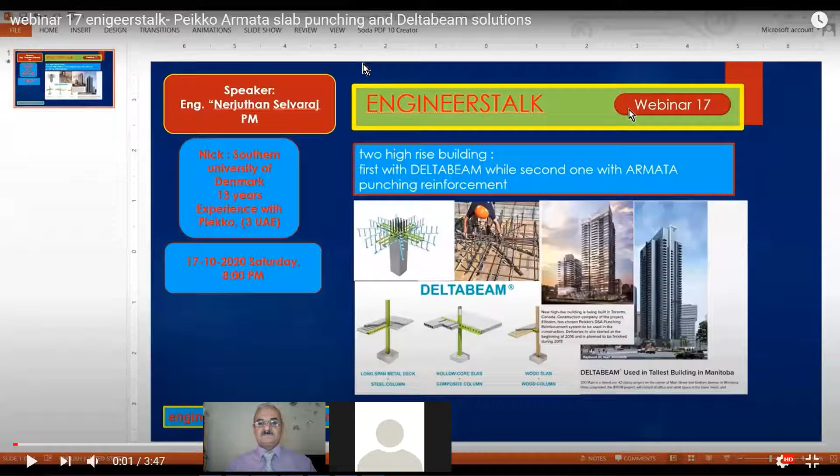Yes, if you allow me to share the screen. Yes, immediately. Yes, thank you.

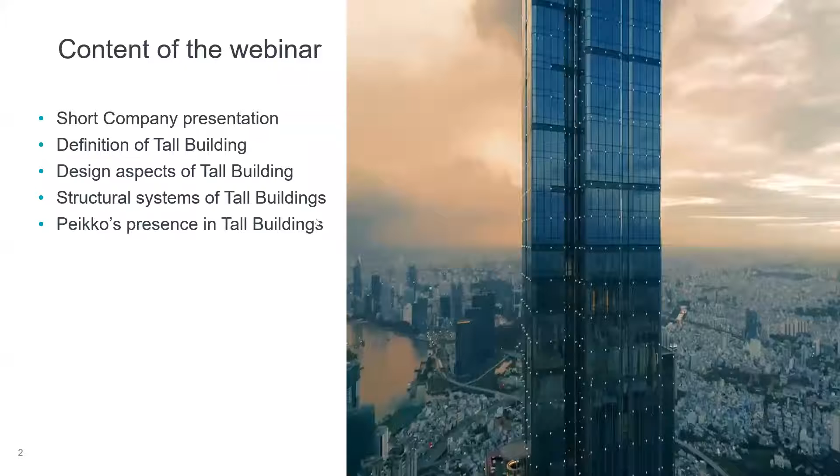And we will also move to the structural system to help resist the lateral forces. And of course, the main part of today's webinar is the Peikko solution, whose application can enhance the different characteristics of the tall building challenges.

The Peikko has been existing for more than 60 years. Actually, it was founded in a small city called Lahti in Finland, and has been run by the same family. The second and third generation has been taking the company into the new era.

All the applications provided today in the presentation are in-house manufactured. We believe independence is the key word, because many of these things are key components in all kinds of buildings, not only tall buildings.

What makes us different from other players is that we reinvest a lot of our earned money into R&D, because innovation is what keeps the company running and ensures that we are meeting the customers' needs wherever we are operating.

Basically, we have 4 main business categories related to product segments: precast connection, which I will go through today with a few project cases. Then we have cast in situ applications.

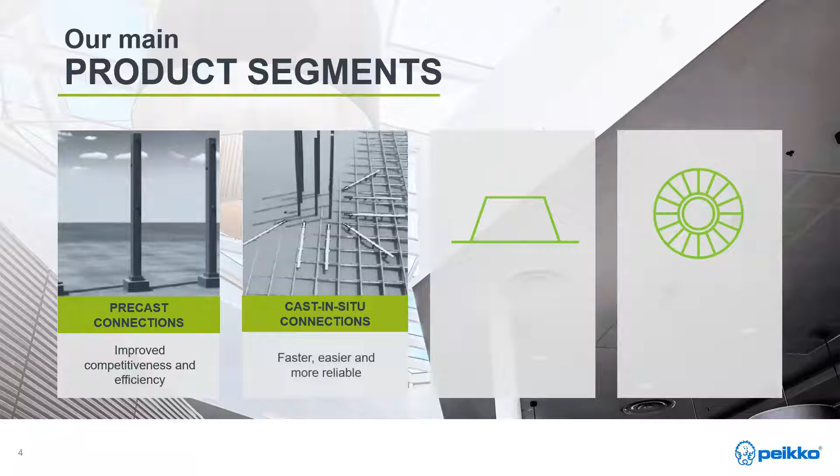Here, the product we will go through is Armata. Basically, it's a punching reinforcement to prevent punching failure. And then DELTABEAM Frame, which enhances the slim floor structure.

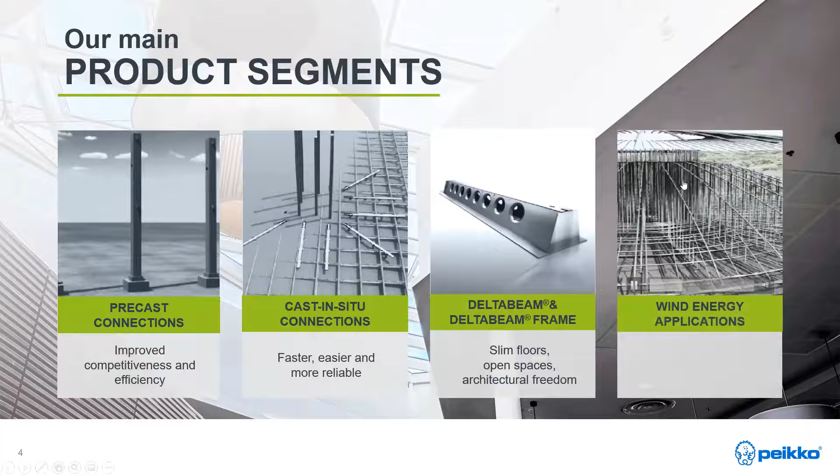And then we also have wind applications for onshore foundations - this we will not go through today. But in all 4 business segments, we are doing our utmost to be the forerunner.

It means we are doing a lot of tests, not only in-house, but in cooperation with multiple universities around the globe. Since we are a European company, most of the collaboration is done with universities located in the European continent.

Just to show you where we are operating on the global map, as you can see, we have a manufacturing facility in Ras Al Khaimah, where we are serving the GCC countries, basically the wider MENA region, along with the Indian market. Otherwise, we have manufacturing facilities in 11 different locations, from China to US to Australia.

And then we have local legal entities - basically sales and technical teams located in 33 countries around the globe.

Let's go to the definition of the tall building. You can call it high-rise building, tall building, or multi-story building. Basically, they all cover the same thing.

The Council on Tall Buildings and Urban Habitat mentioned that height relative to context, proportion, and tall buildings embracing technology are the criteria which can determine whether a building can be classified as a tall building.

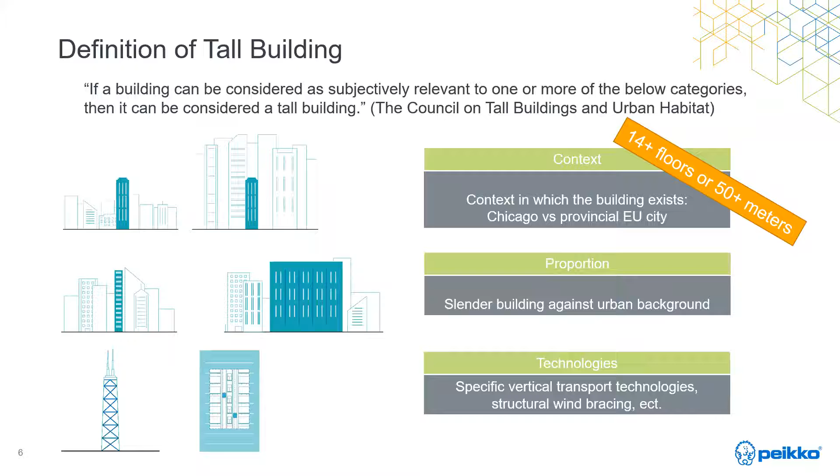If we move to the main design aspects, once the building grows taller, the vertical load increases with the height, while at the same time the horizontal loads increase significantly.

And obviously this affects the tall building much more. Therefore, a tall building must have adequate bending and shear resistance and shall not lose its vertical load bearing capacity.

Worldwide, tall building design practices differ and might be covered by a combination of gravitational, wind, and seismic considerations, depending on the local building code.

The main design objective is to ensure adequate lateral stiffness of the building. In principle, the structural engineer needs to satisfy two criteria.

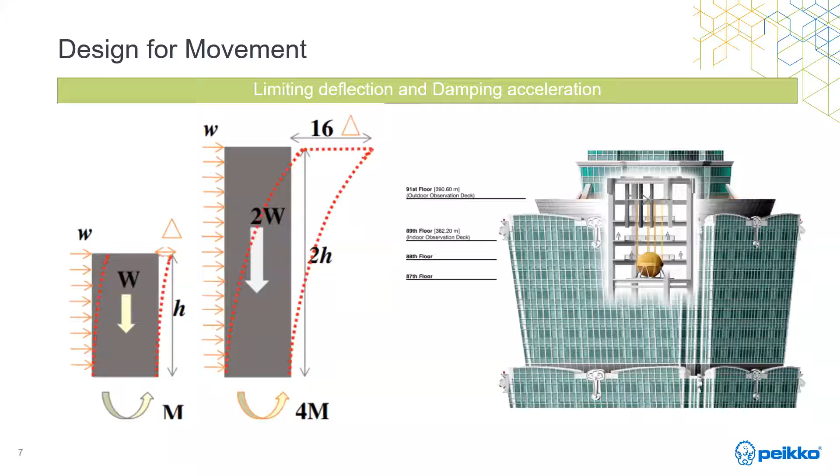Here on the right side of the slide, you can see the largest and heaviest mass tuned damper, in the world-famous Taipei 101 in Taiwan. It was once the tallest building before Burj Khalifa took over.

If we go to the classification of typical structural systems used in tall buildings, as discussed before, transferring gravity loads and resisting lateral forces is the important role of the structural system.

Therefore, the hierarchy of systems is mostly categorized with respect to their relative effectiveness in resisting lateral force. So what does this mean?

As you can see here in the picture, engineers have tried to develop systems based on exterior structures, where basically all the columns carry the lateral forces, or interior structures where you have cores or shear walls to take the stability of the lateral force.

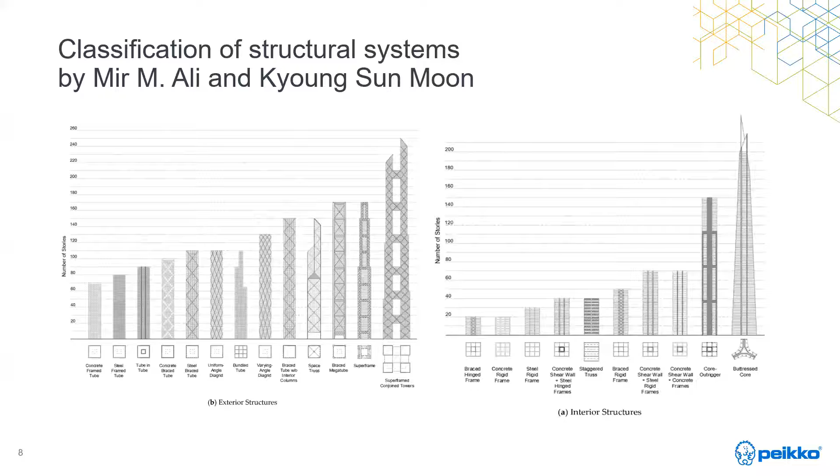Because of the time limit, I will not go through all these systems separately, but will make it much simpler.

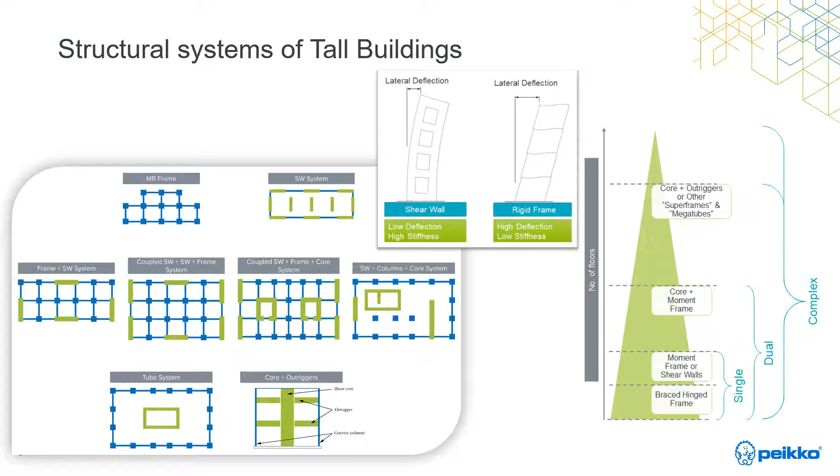So let's move to the main part of today's presentation, which is Peikko's presence in tall buildings. Regardless of the structural system chosen by the structural engineer, the connections between elements are vital in every tall building. One of the most important aspects of lateral force design is the connection between elements of the building.

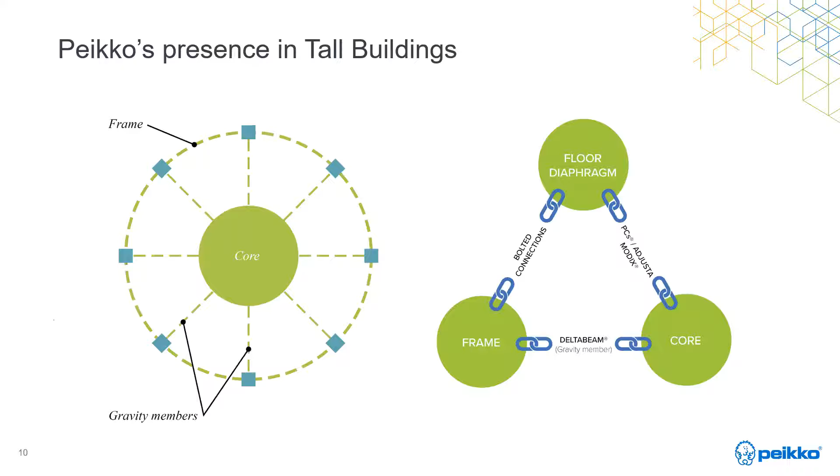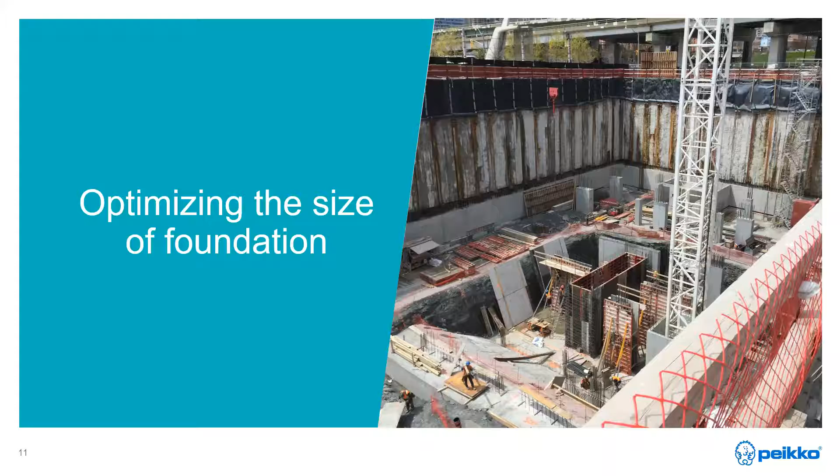On the coming slides, I will take you through some Peikko solutions with a real project case study. I'd like to start with the foundation and the kind of solutions we provide. In this case I've only taken one project with you. We have multiple reference projects in our portfolio, but since I want to showcase as many cases as possible, I've only taken one project.

In this project, Peikko's double-headed shear rail system is not tying structural elements together, but contributing to the element geometry and the construction process, which I will also cover in a later slide.

Depending on market requirements and compliance with local design or material standards, you will find two types of punching reinforcement in Peikko's portfolio. One is called PSB punching, which you'll see in some other presentations, and then we have Armata punching. The difference is that Armata is used according to ACI, and PSB is used in relation to Eurocode in the European market. So we have a system which covers both the European code system and the American code system. The same solution works for foundations, beams and walls as well for punching.

This Monde condominium in Toronto, Canada is a high-rise project using the shear rail system in particular in the foundation walls of a 5-level underground parking structure. As you can see in the picture, the site is located directly adjacent to a lake, so the walls are designed on the assumption of a water table at the ground surface. With a 5-story underground structure, this pressure creates high shear forces on both sides of each suspended slab.

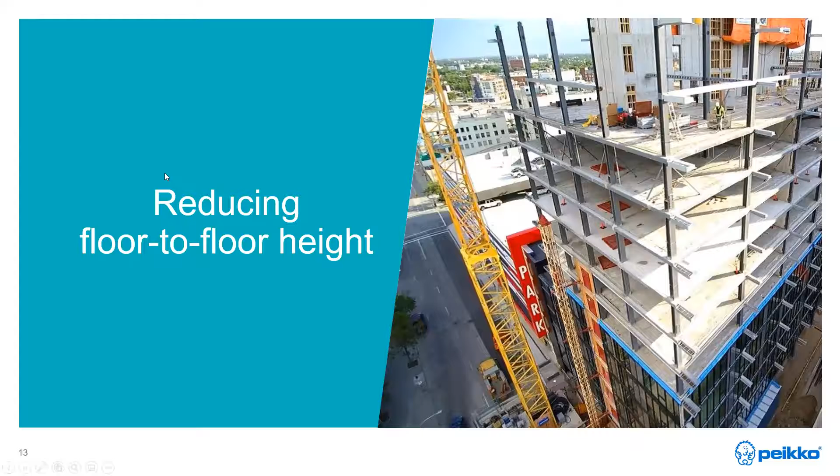It's no secret that developers want to maximize the number of floors in order to get more rentable space within a certain height allowance. The slim floor structures help very well. By reducing the floor plate thickness, floor-to-floor height becomes lower, which in turn yields more floors for a given building height.

This project, 300 Main, is a 42-story building on the corner of Main Street and Graham Avenue in Winnipeg, Canada, and it used the slim floor concept. A typical floor in this project is a combination of delta beam and hollow core, and you can see steel columns in the bottom left picture.

The other option of using hollow core with wide flange steel beams was also considered for the new tower, but this solution would have resulted in a building at least 15 meters or 50 feet taller, which would have increased the total price of the project significantly. So it was clearly a no-go on this project. Delta beam instead saved overall height, adding floors and maximizing the total square footage.

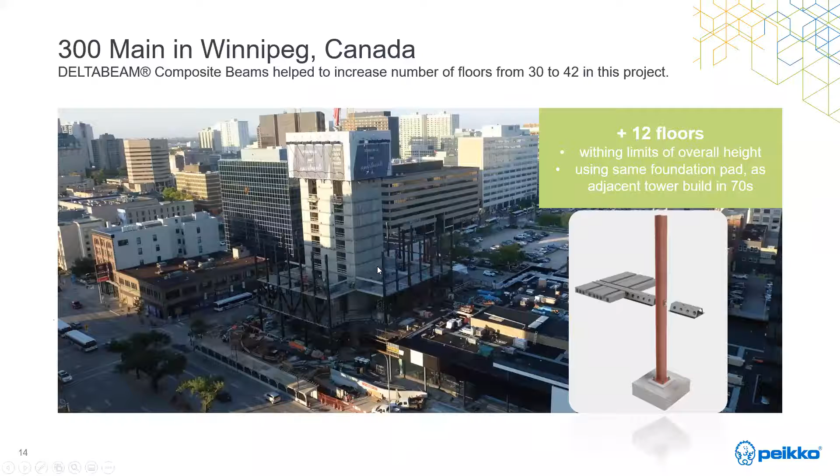Talking about the savings in the same project, I will go to the foundation size because there are a few examples of how this has been achieved. The powerful argument in favor of slim floors is that you are reducing the weight of the overall structure, which in turn makes the foundation less expensive.

In this case, 300 Main new tower is designed with the same foundation pad as a similar building called 360 Main, next to this new tower, which was built in 1979. Since the combination of delta beam, hollow core, and steel column is much lighter than the previous cast-in-situ concrete tower, the developer was able to increase the number of floors from 30 to 42, using the same foundation pad as the cast-in-situ structure.

So this is another strong argument why slim floor structures are generally very much recommendable. The added advantage of delta beam composite beam is the 2-hour fire rating without any additional fireproofing, which also proves to be a substantial saving compared to conventional wide flange steel.

The next project is also located in Winnipeg, Canada. Like the previous project, it also uses delta beam composite beams, and it played a very important role in meeting the needs of the architect and the structural designer.

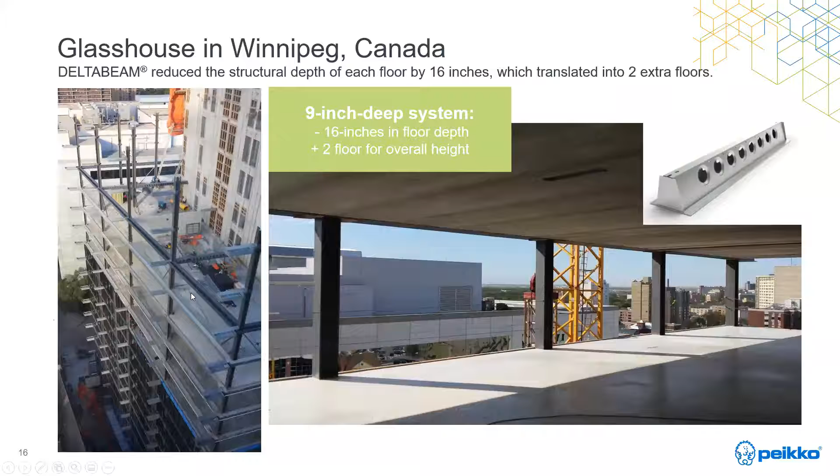Besides adding extra floors, since everything is prefab, it also allows for rapid speed of erection. Delta beam composite beams were then connected with the column using the Peikko modular PCs corbel.

I think you can barely see it here. It's actually a hidden corbel system, welded from the factory onto the steel columns. So it gives you this kind of Lego-like ease of installation.

And flat ceilings, as you saw in the previous slide, also mean straightforward HVAC installation that further reduces your building time. An additional bonus to the Glasshouse site was that the delta beam composite did not require any of this kind of intumescent coating.

Intumescent coating is a standard industry procedure. If you have exposed steel, this has to be done on site, and it takes time. You need a primer, a base coat, and a top coat. None of this was needed with delta beam, as the beam is cast in concrete.

To prove this point, delta beam has actually been UL tested and has achieved 2 hour, 3 hour, and 4 hour fire ratings without any additional fire protection on the exposed steel part of the delta beam.

The next project in the slim floor category is not with the delta beam, it's with our PSB and Kobo. Now we've moved to the European continent, and we will not have Armata as mentioned earlier. We'll speak about PSB, basically the same product, but due to local requirements, we call it PSB.

Reinforced concrete slabs have been used in this project, supported by high-strength precast concrete columns and shear wall cores. Generally, in-situ flat slabs are characterized by the absence of beams. Whatever loads are added onto the slab are transferred directly to the column, so the columns need to punch upward through the slab.

So to avoid drop panels over the column position in the slab and to accommodate the high shear stresses, Peikko PSB punching reinforcement in combination with Kubu column caps was applied for this project, as you'll see in the next slide. Kubu is basically additional reinforcement to take high shear force along with our PSB.

This is the Kubu, the steel part placed on top of the column, and the thickness of the slab was kept at a relatively low level with the help of our product. Part of the concrete and column were produced in a precast element factory and delivered with our Kobo, as you can see on the right side of the picture.

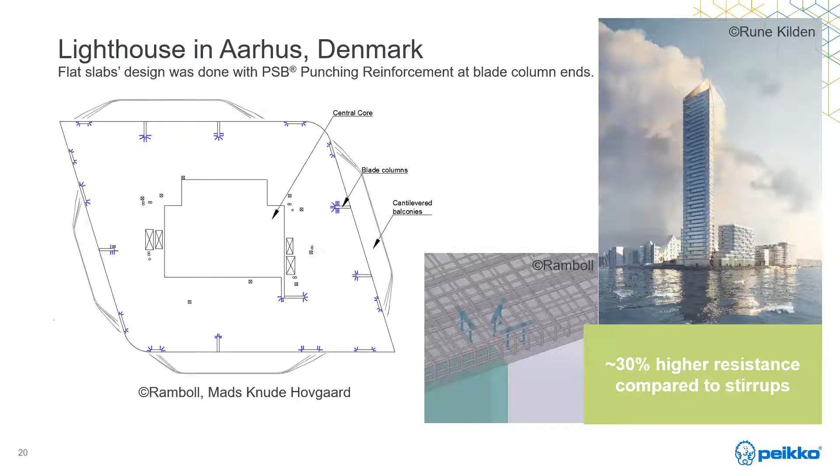The project is ongoing and planned to be completed in 2022, and it will be one of the highest buildings in Denmark.

The last project I'll take you through is the Alsik Hotel, also located in Denmark in the southern part, in a city called Sønderborg. It's designed by the world-known architect Henning Larsen, who also designed the Ministry of Foreign Affairs in Riyadh. This is the picture you can see, just a bonus information for you guys.

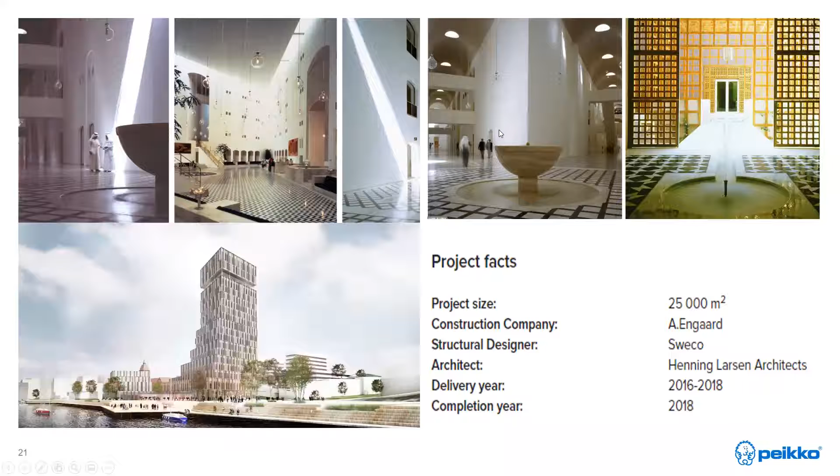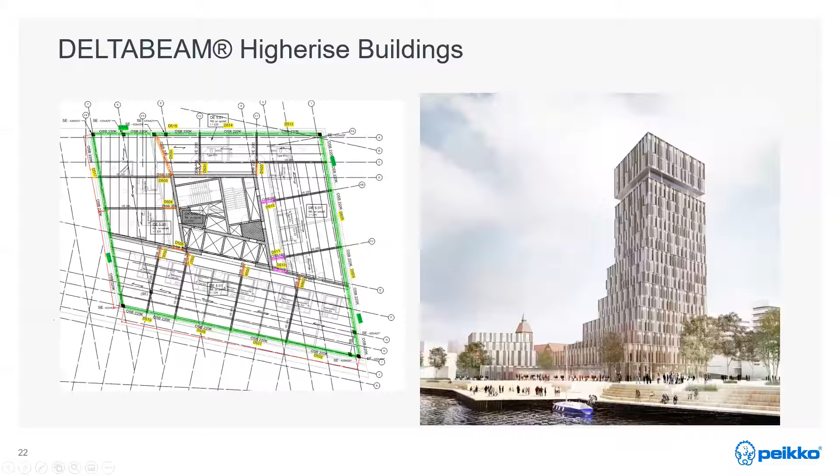The structural concept is very much in line with what we already spoke about. You have a central core in the middle, cast in situ, and then precast columns in the perimeter with a delta beam in green, and internal beams, as you can see here, the small beams in the corridor area. So the MEP can be done without any drop beams, supported by precast walls, shear walls here. This is how the structural system has been done.

So in the next slide you'll see the detail. The delta beam runs through the columns, and we've also utilized the Peikko column shoe in this connection, which I'll come to later in my presentation.

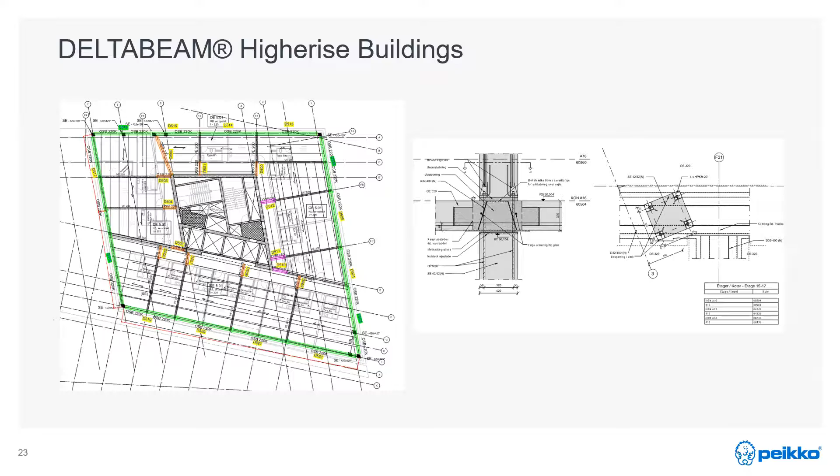One of the main challenges was to control the deflection in the delta beam. They had these glass facades, and the facades are directly fixed to the delta beam. Due to the sensitivity of deflection on the facade, the supplier had a very high demand on the deflection criteria. So all the beams on the periphery here are designed for L over 2000 for the incremental deflection, applied by the movable deck load and live load.

So we can design the beam for a very tough deflection requirement as well, and still achieve a relatively slim floor structure.

Let's move to the main part of structure in the tall building: the core. During construction, the engineer's concept is to keep the core without any protruding elements, because this enables you to use climbing formwork, as you can see in this small animation. I will go through some applications which can meet this requirement without any protrusion or bent bars sticking out, and avoid wet connections which can be hard to control.

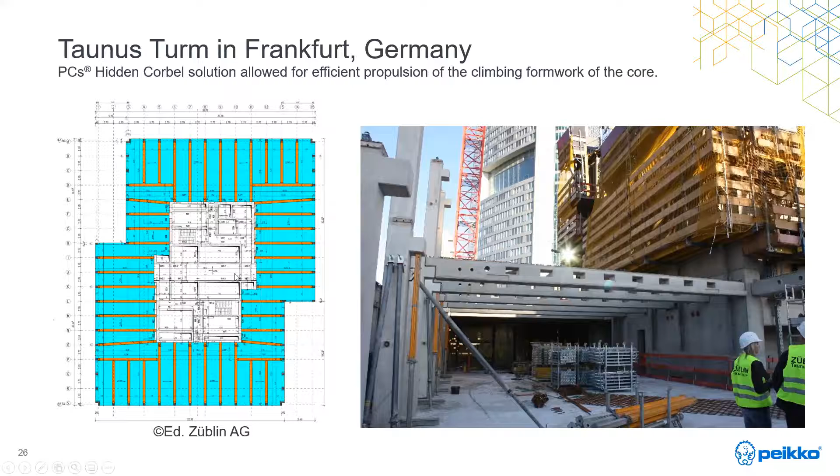Go to the next slide. You will see here cast-in-situ reinforced concrete shear wall cores are widely used in tall buildings, as mentioned, simply because in-situ concrete technology is favored by many engineers due to the structural continuity it provides. But on the other hand, we are seeing a clear increase in use of precast concrete technology in tall buildings, and the main advantage is high speed of construction, reduced shoring requirements, and easy quality assurance at the site.

The major challenge in this project was the limited space available on the building site; storage capacity in the upper floors of the tall building was very limited. So prefab cast concrete columns, beams, and slabs were selected to eliminate the need for space-consuming formwork. To simplify construction, you can see in the picture our PCs corbel has been embedded into the shear wall before the reinforcement cage was applied.

Once you remove the mold from the core, you get a clear surface, and then you fix the steel part afterward, shown in red. Into the concrete beam you have our beam shoe, which is embedded into the precast plank, making it a simplified installation process. There's a recess in the bottom, and you simply slide it onto the column.

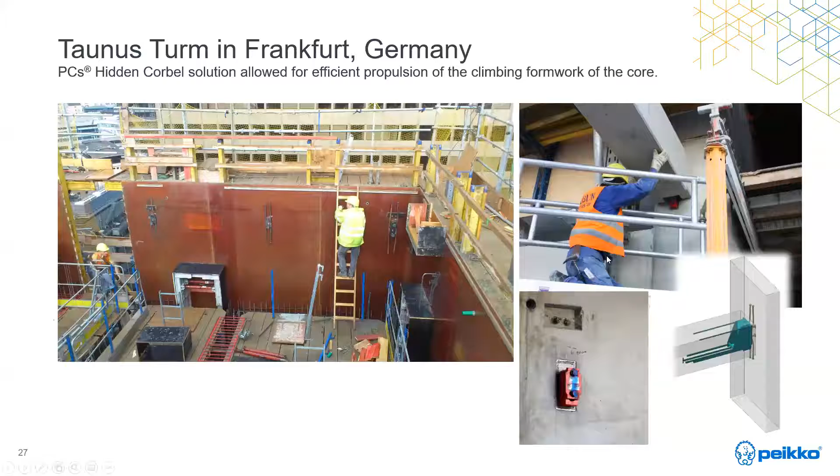In this section, I would like to introduce how to connect structural elements in a simple way. Some of the items I will go through are basically Peikko bolted connections, and here we will look more closely into the single element itself. The first project I will take you through is again in Germany, Frankfurt.

A central feature of the architectural concept here is the hip swing, as you can see, with alternating cantilevering of the 15th to 22nd floor residential levels. The direction changes with a cantilever of up to 5 meters. At that level, the building forms a spiral by shifting the stories along its vertical axis. Above the 22nd floor, the tower returns to optimize floor areas and complete its rotation, realigning with the structure underneath these alternating cantilevers.

Additionally, the first three base levels, designed as public space, are also offset along the vertical axis, which means the geometry of the supporting section had to be optimized in order to minimize the inclination and deflection of the columns.

The office floors from 3rd to 15th and from 23rd to the roof have the same regular floor plates. For these typical floors, the diaphragm consists of main beams, as shown in the typical floor in the center of the slide. Again you have a core, the outer perimeter is supported by precast columns and precast primary beams, connected by secondary precast beams. So there are a lot of connections which have to be considered.

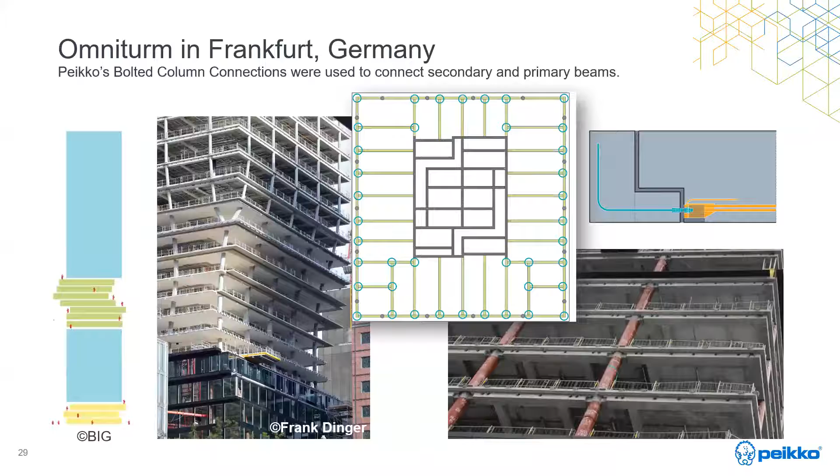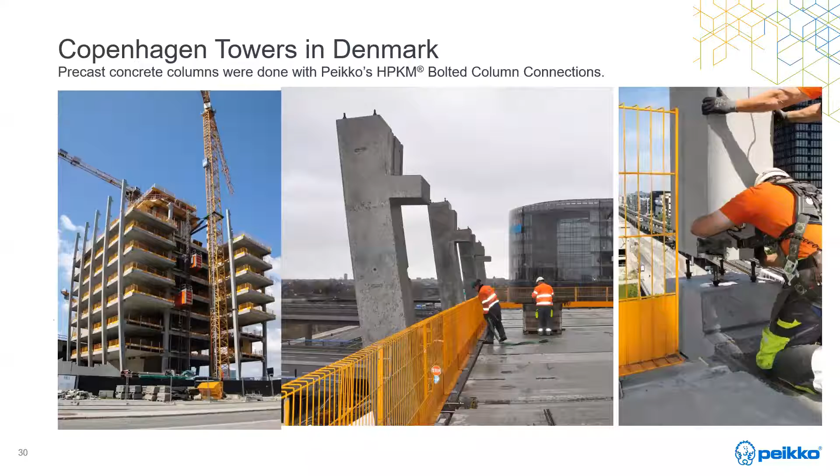Since crane time was decisive when building this tower, it was decided to use 2-story precast concrete columns in the facade. The 2-story facade column, as well as all other precast concrete columns, were done with Peikko's HPKM column shoe. Here you see on top of the column the anchor bolts embedded in the concrete column, and here on the bottom part of the column the Peikko column shoes embedded. It's 4 bolts and nuts tied together, and once the bolts and nuts are tightened, you have a fully rigid system. As you can see in the picture, no bracing is required. This was again one of the reasons why we were chosen as the design partner and supplier of the system.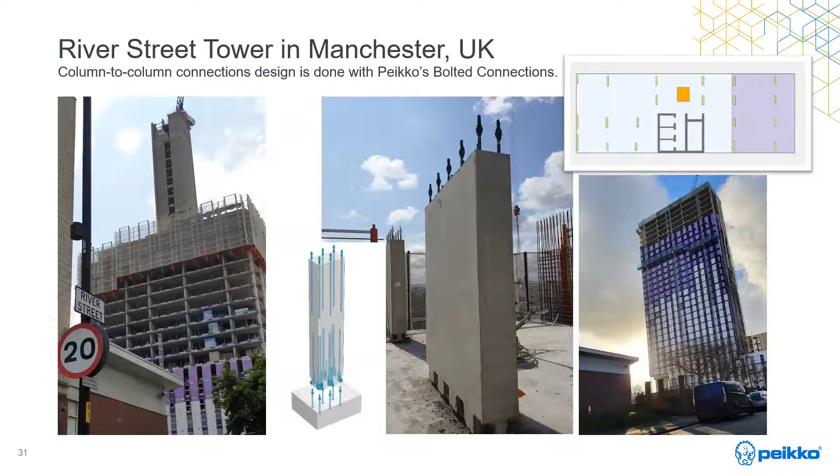If we go to the next, design flexibility. In this section, I will showcase one project where normally Peikko engages as a design partner when the project is, let's say, not from the concept stage, but we come in providing the stiffness value to ensure that global stability is secure. So we are not doing the design itself for the full structure; that is the responsibility of the main lead consultant. But there have been cases where Peikko has taken the full scope of design.

In the next slides, I will go through one of the projects. This is actually a 20-story tall building called Icon, located in Sweden. The key feature here, as you can see in the top left corner, is the massive cantilever which forms the crown of the building.

The global stability of the building was achieved with a braced Delta Beam frame, a steel and concrete composite structure consisting of composite columns and Delta Beam composite beams. The composite frame was paired with hollow core slabs and a precast elevator shaft, so no cast-in-situ element at all, no cast-in-situ core whatsoever.

With the Delta Beam frame, as mentioned previously, you can maximize space utilization, making room for more people within the same available space. Besides the slim floor that allows for greater floor-to-ceiling height, the slender composite columns take up very little space as well. This translates into more floor area to sell or rent.

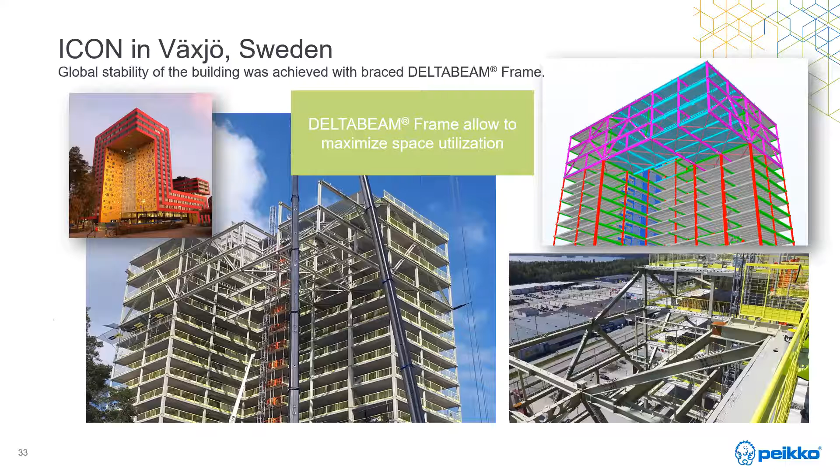If we go to the next slide: in this structural system, the Delta Beam frame is based on nominal pin joints between beams and columns, while the sway stiffness of the frame is arranged by diagonal braces, as you can see in the picture here. In a braced structure like this, most of the beams and columns are designed for vertical load only, assuming the braced bay carries all the lateral loads. So the lift shaft, which was precast, due to its very low axial load, was not even considered to take any lateral load resisting contribution.

As mentioned previously, the unique feature of the building is this 3-story crown structure on top of the building, with up to 14 meters of cantilever from the building footprint. This was done mainly with cantilever trusses bolted together at the site.

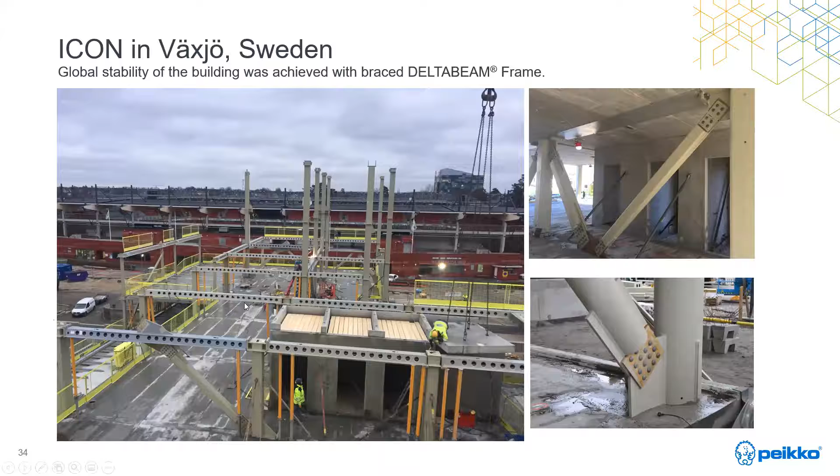And if you want to combine precast elements with cast-in-situ structure, as showcased in this very complex building, we have connection details to accommodate that as well.

Before we go to the question and answer time, I would like to showcase three different videos which show the projects in real action.

The first project is also located in Copenhagen. It's a G+30 building, if I remember correctly, with a core in the middle, and the rest of the elements are precast. Here you will see the bolted connection in action.

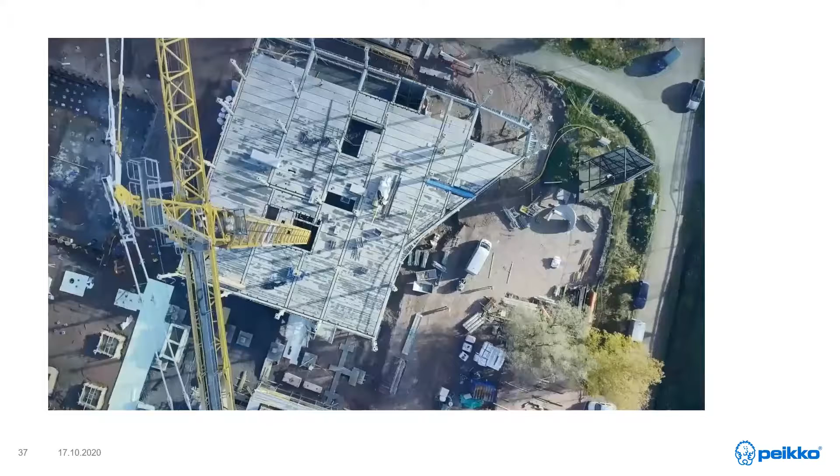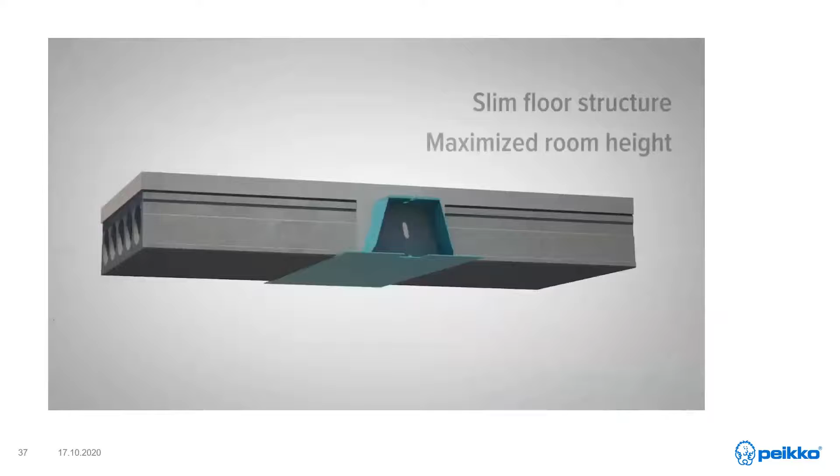Are you looking for a building frame that saves both time and effort? This is it, the Delta Beam frame. A complete one-supplier solution consisting of Delta Beam composite beams, composite columns, and other additional steel structures of the frame. Being a slim floor structure, it allows for a maximized room height and up to a 12 by 16 meter grid. Additionally, Delta Beam frame enables architecturally demanding facades and shapes and flexible open spaces.

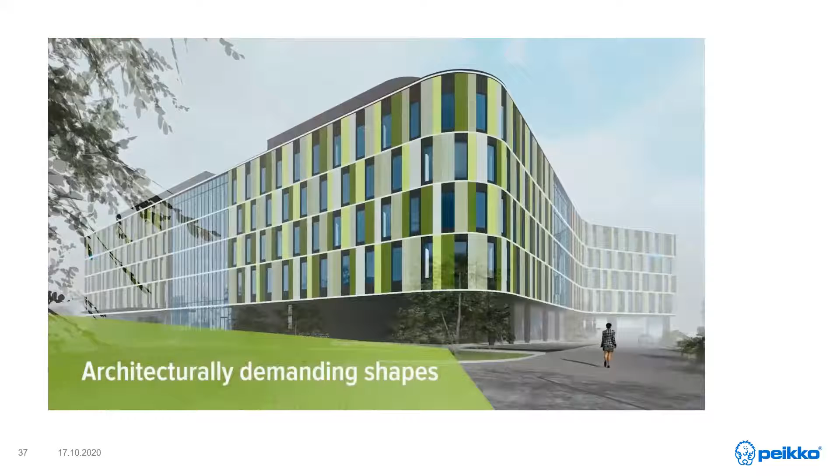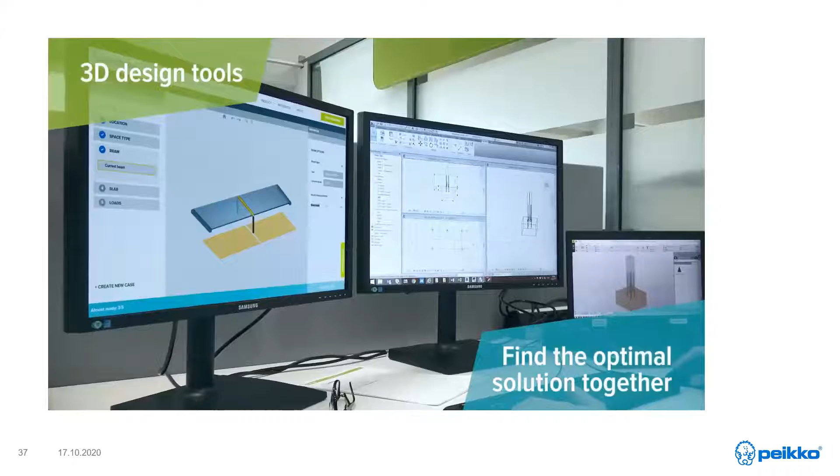Our expertise in modern 3D design tools helps us find the optimal solution together with your architects and structural designers. The CE marked frame components are manufactured in our state-of-the-art factories. Components are easy to transport, store, and install.

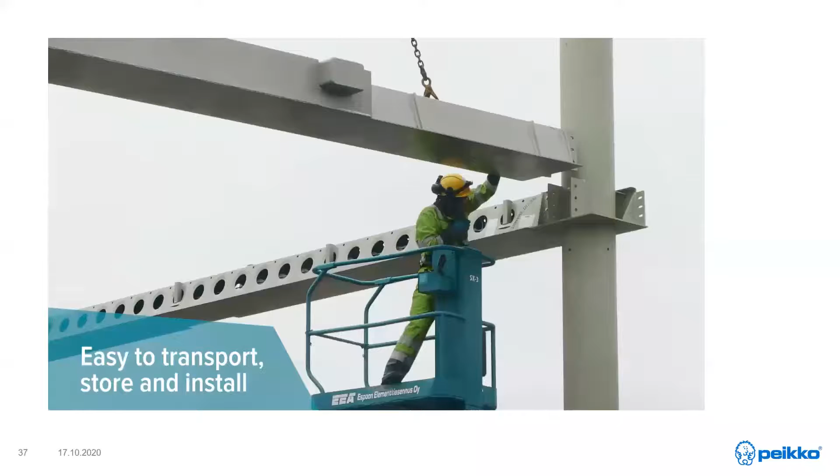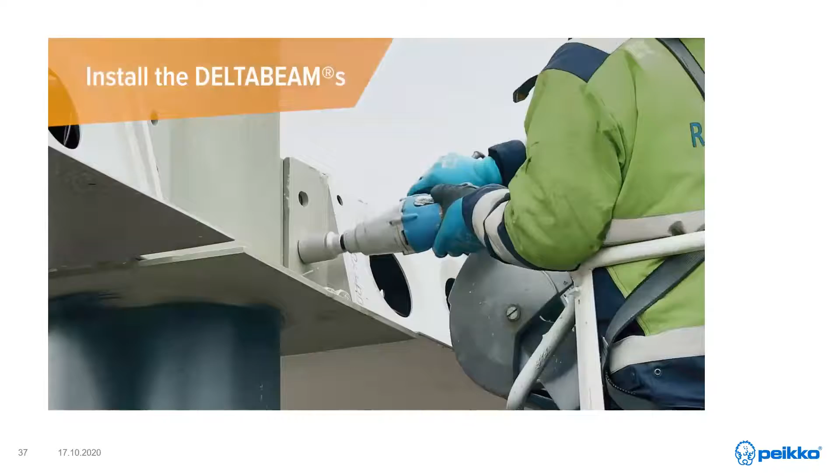First, erect composite columns with our bolted connections. Next, hoist and install the DELTABEAMs. Now you're ready to install the slabs, whatever your chosen system is. Fill the composite columns with concrete and cast the DELTABEAMs while you concrete the slabs.

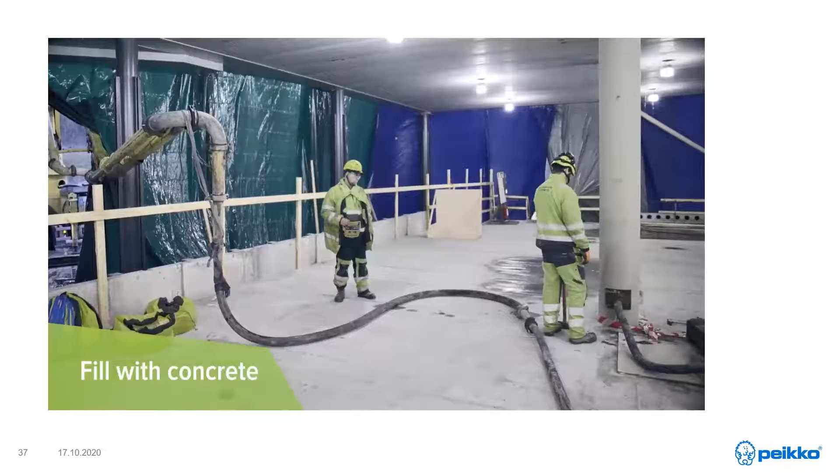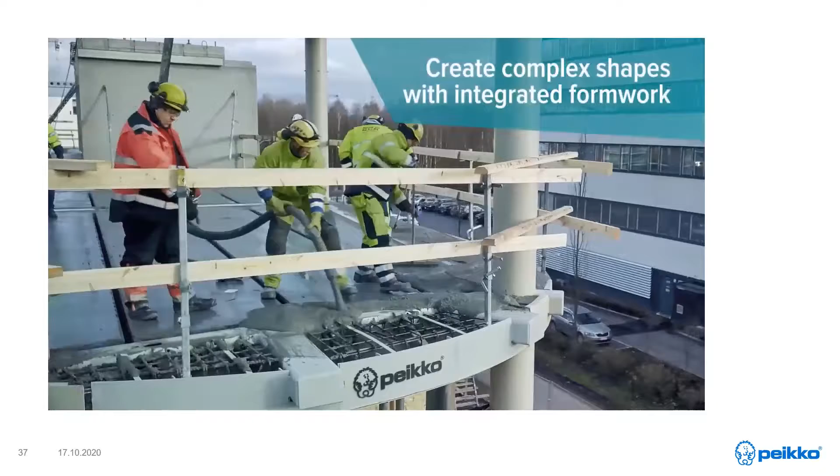Note that you don't need any extra fireproofing. DELTABEAM frame has structural fireproofing built in. Additionally, you can create complex facade and interior shapes with formwork integrated in the DELTABEAMs.

Easily install safety rails. Use Petra slab hangers to create openings in the slabs. Install the wall elements fast and easy with Sumo wall shoes.

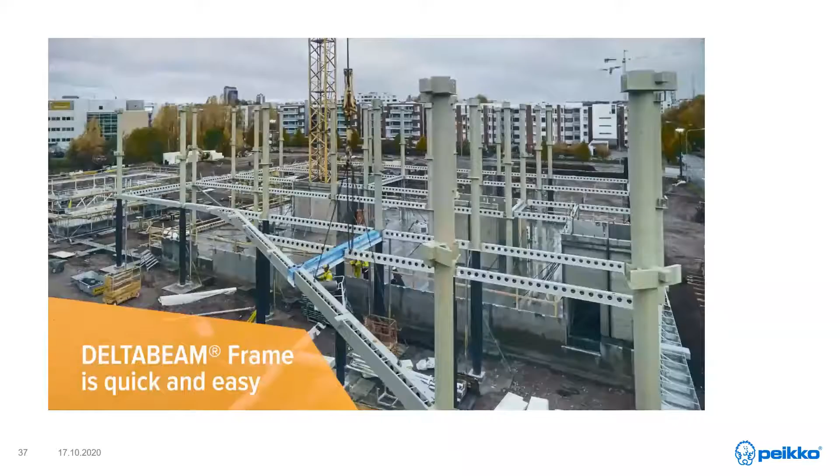A single frame supplier for saving time and effort, the DELTABEAM frame is easy to erect piece by piece. For you, it means an easy-to-manage project. For more information, take a look at Peikko.com/deltabeamframe and choose the faster, safer, and more efficient way to build frames.

The last video is not a real project presentation, it's actually an animation of our Armata. What I can say is that we have done multiple projects in KSA with this Armata for large projects where there has been substantial savings for the contractors, and of course achieving your slim floor so your MEP can run through without any bendings. So let's have a look at this Armata and then we will go to the Q&A.

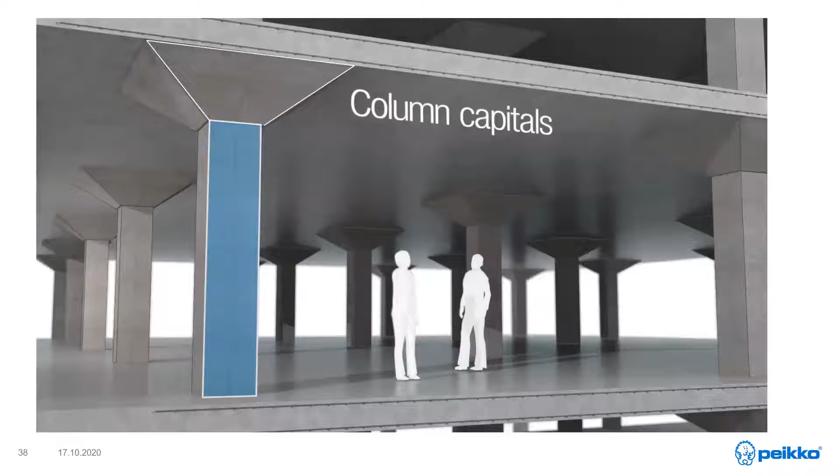Just to give you a bit of information while the video is running, the idea is to avoid the kind of drop methodology you are using to accommodate punching forces.

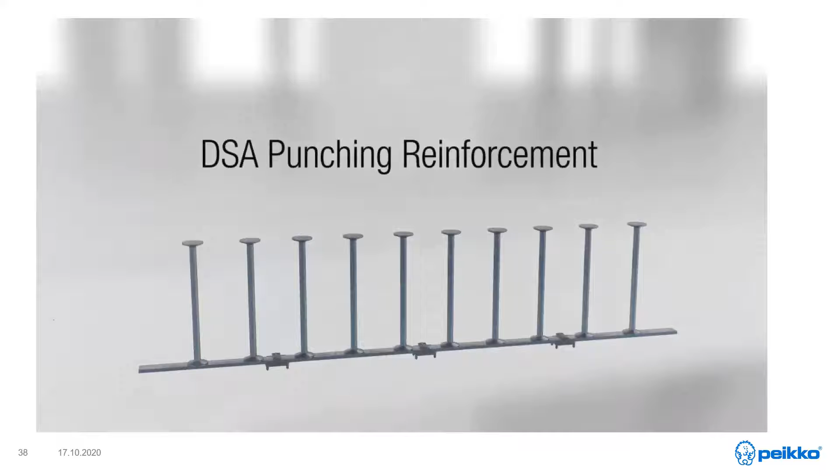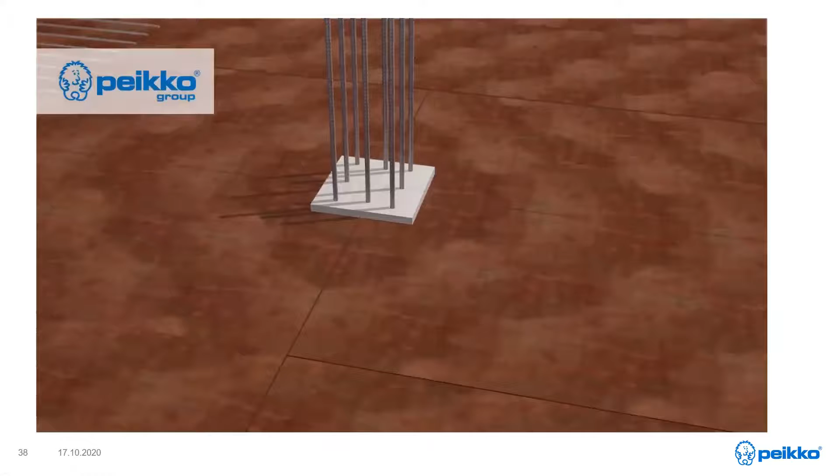The installation here can be done in two ways. One is that we create the mesh shown in the animation, the bottom and top mesh, and based on our design, either we will design it for you, or there is a pre-designed tool on our webpage. Based on the given information, it will give you the length and spacing and so on, and you will place it on top.

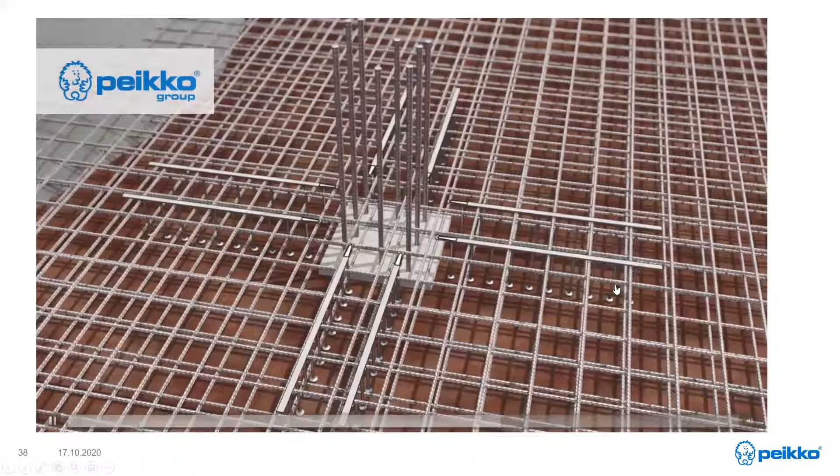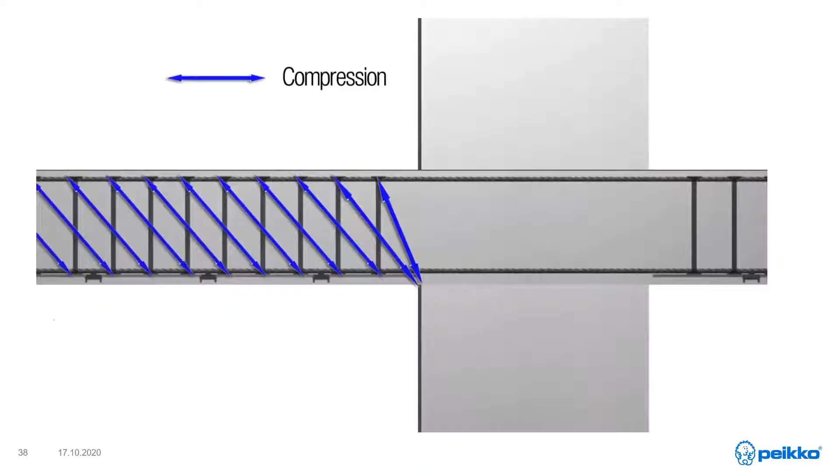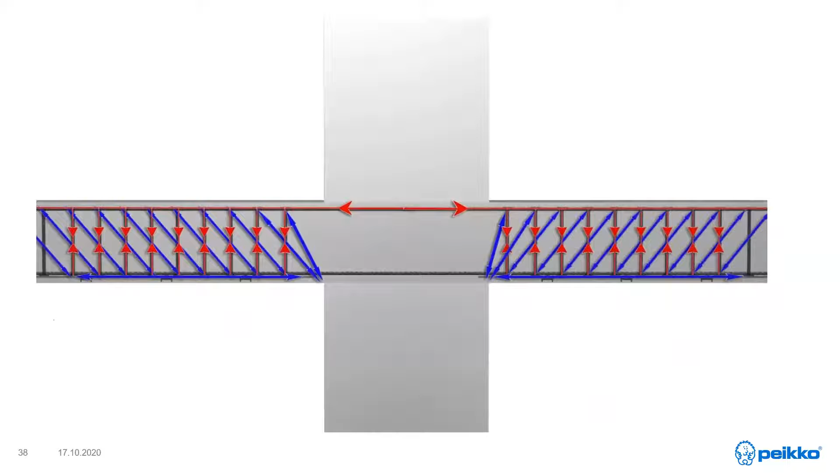The upper limit here is of course the maximum resistance of the slab, so we can't exceed that.

If you want to find more projects where you see our applications applied, you can go to Peikko.ae reference, and there you can find all types of projects Peikko has been involved in, from Delta Beam to Armata to bolted connections, and you can filter based on location by country, or according to building type and product as well.

So let's move to Q&A. I hope I covered most of it today. At least I was covering your questions.

So as you can see here, the delta beam, if we are using it in this kind of concept where you have the core and then the perimeter to take the lateral forces, the delta beam in this case will only act as a gravity member. So the connection between columns and beams will primarily be a pin connection. But the delta beam, along with your floor diaphragm, will be able to transfer the axial forces into your core, which is induced by wind or seismic.

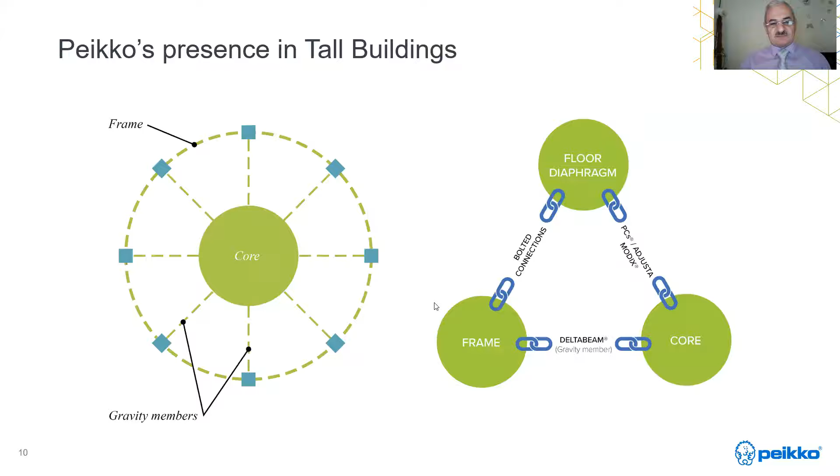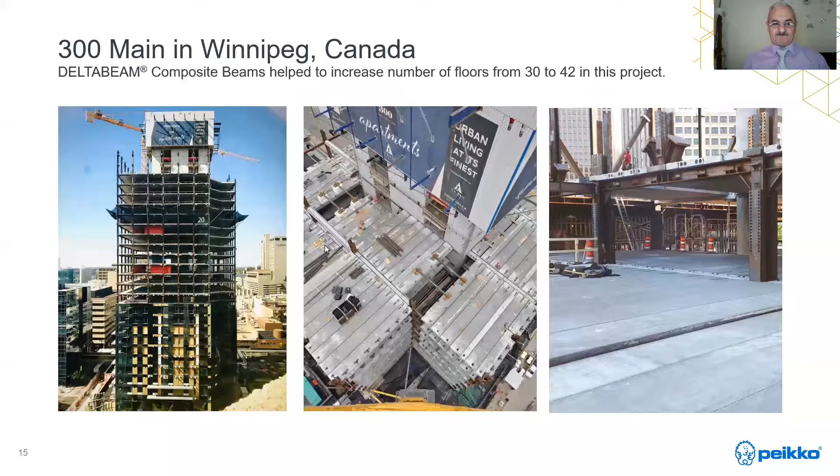The question is about the same point for earthquake effect on this connection, and whether we are doing any preparation for this connection to dissipate earthquake effects. So what are we doing here? So what is Peikko doing here, yes. Basically, because as you know, we are going to high-rise buildings, 40 floors and 30 floors, and there is an effect from earthquake or wind. Yeah, so as you can see in this building which I was going through with you, these are simply pin connections.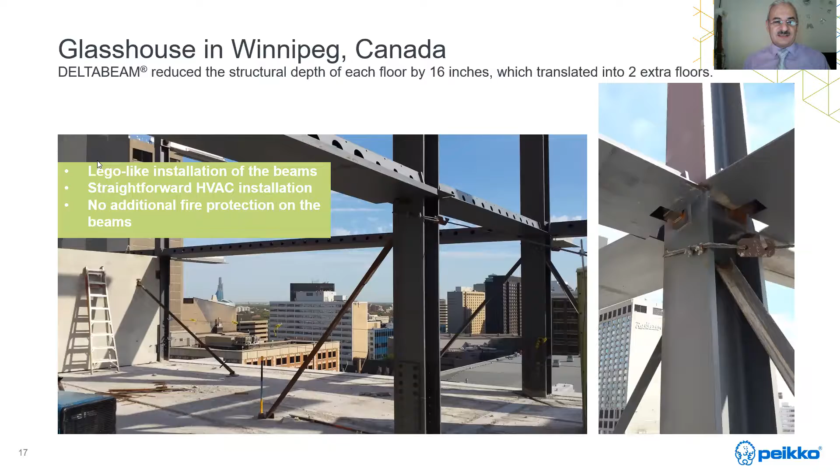What is the difference between your stud Armata and what is available in the market, between your different type of stud shear? Okay, so basically this head stud is not a new innovation - it already exists in the market. The conventional method is the shearling, which I already mentioned, and everybody is aware of that, how you design it, how it works, and all the complexity you have at the site.

So you have the yield strength of 500. The second thing is we are able to manufacture in the UAE, and as far as I know, Peikko is the only manufacturer who has the production capacity or capability to do it in the GCC region. As mentioned, this product is not new - the system has existed, and what's happening in the region is it's mostly imported from the US or European countries. So we are very cost effective compared to competitors, and of course we have a free design tool, and can give you full design support as well.

Okay, thank you. I have two questions, and I'll let the colleague see. Actually, in your system, sometimes we notice a mix of RC with steel, with the DELTABEAM system. With this complexity, let's say, between these different types of structural elements, how will we achieve or implement the code in such kind of building?

Let me see if I understand your question. Basically, the structural engineer will define what code to be followed. What I mean - let's explain this. For example, for concrete, we have the code specifically for concrete. We don't have a code for steel and concrete together. For steel, we have the code for steel. And for delta beam, you have your own specification, I think, and also it is according to the codes.

But we are mixing elements - different elements, concrete, steel, precast. Actually, I'm not that strong in the ACI, but what we have in the European code system, Eurocode 4, if I remember correctly, is a code developed to address composite structures. The delta beam follows the guidelines given in that generic code, Eurocode 4. But along with that, since our delta beam achieves the composite effect differently from what is mentioned in the generic code, we have done a lot of tests.